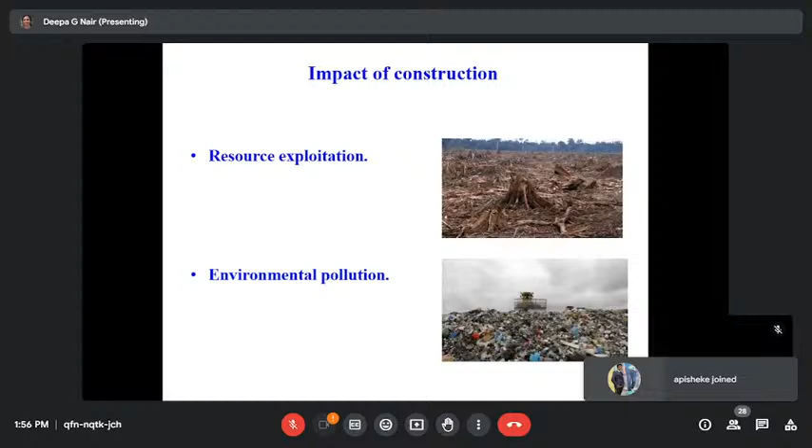Before going into those details, we can talk about the impacts we want to overcome. These are the figures: resource exploitation—40 to 50 billion metric tons of raw materials like crushed rock, sand, and gravel are extracted from quarries every year, and half of it is consumed by the construction industry.

There we need to see the importance of how far the construction industry is utilizing resources. That was a worldwide statistic. If we take the case of India, currently it is—this detail is from a 2018 reference, but we can still relate to it—0.7 million hectares of agricultural land is being used for brick kilns in India, thus destroying the suitability of topsoil for cultivation.

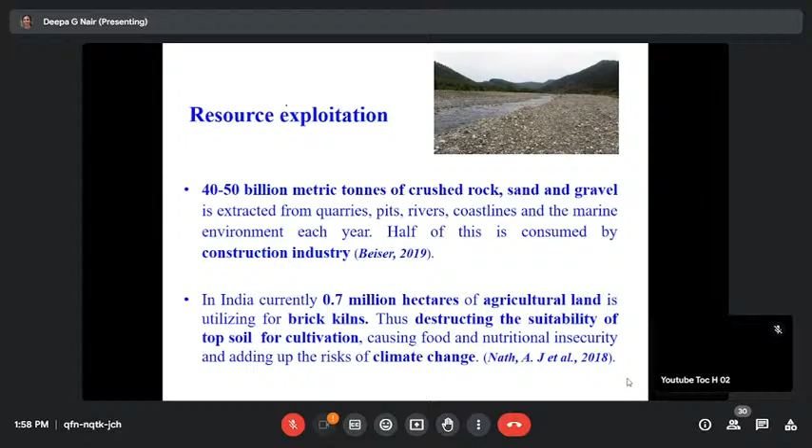Here in Kerala also we can see how far, to what extent, the land was utilized for brick kilns, how it was affecting our climate, and we were able to notice the ill effects of all those things in recent years also.

With regard to environmental pollution, embodied greenhouse gas emissions due to the construction industry are approximately 5% to 10% of the entire energy consumption in developed countries, and 10% to 30% in developing countries.

If we take the construction industry, we can see that cement is a mandatory material for construction. All activities need cement. How much quantity of energy is utilized for cement? All of us are aware about that.

1 kilogram of cement manufacture produces almost 1 kilogram of carbon dioxide. It's actually 0.9, but we can say almost the same amount of carbon dioxide. So it is contributing to environmental pollution.

And here is another figure: the building industry generates 35% of total greenhouse gas emissions and 33% of all energy consumption.

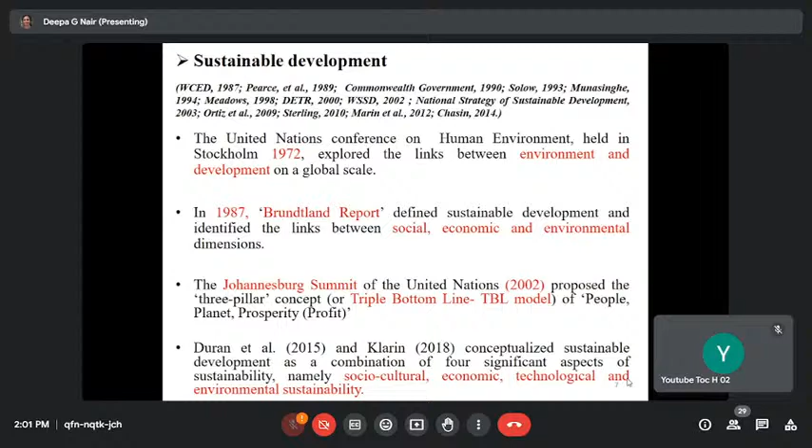Later, in the Johannesburg Summit, one more factor was added. There also they were talking about the triple bottom line concept, the 3P concept: people, planet, and prosperity. But after that, many researchers worked on this, and they introduced a fourth P related to the project, which we can call technology.

So this was the concept earlier: the 3P concept of environment, economy, and social aspects, but it has changed to the 4P concept: people, socio-cultural aspect. Whatever technology or development we are proposing, it should help the people. So we need to think about their aspirations and requirements, and accordingly propose something. Only then can it be sustainable.

And we need to think about the environment, of course. Prosperity—how far it is economical, how far it is affordable—and definitely related to the project, we need to think about the technology. So sustainable development is a 4P concept. It's actually a balance between the present needs and the future needs.

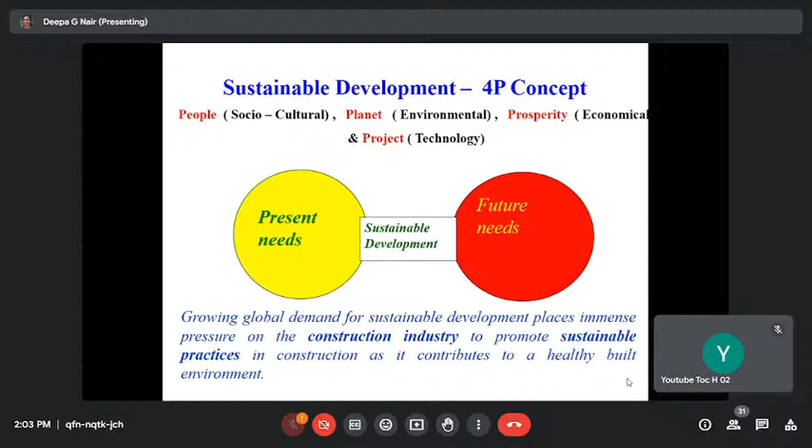Now we can see how influential the construction industry is in contributing to this objective. We need to know the importance of construction practices to make it sustainable for contributing towards this objective. Then we need to think about sustainability in construction practices, how far it is possible. We'll see that. So what is sustainable building?

If sustainable development is a balance between present needs and future needs, the same way we can connect sustainable buildings as a balance between present building needs. If you are proposing a building, it may be serving the needs of the people. So the same way, the resources we are utilizing should be there for the future generation.

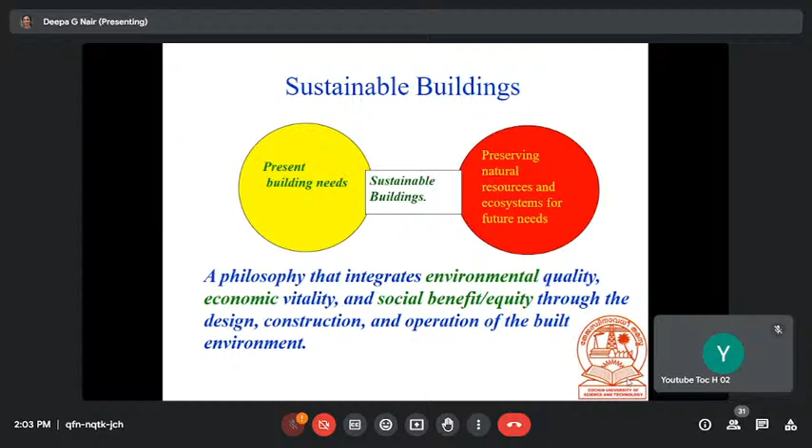So what do we need to do? Preserve the natural resources and ecosystem for future needs, without affecting the natural environment. That's the concept behind sustainable buildings.

But nowadays, all of us are talking about green buildings. Yeah, we'll come to that. So this also is a concept put forward by sustainable buildings.

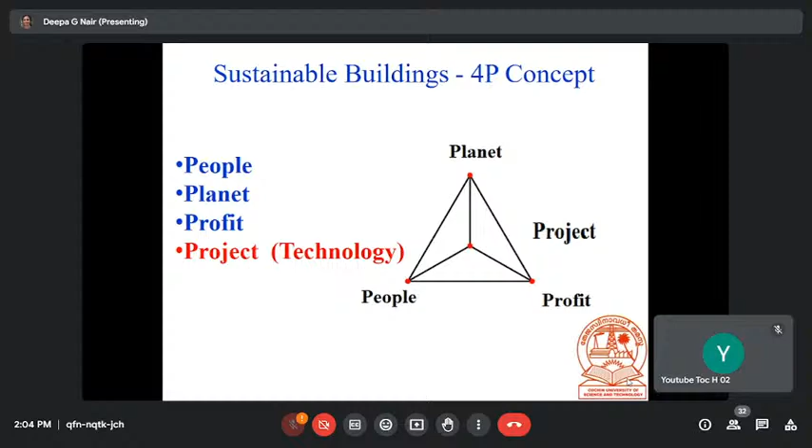But what about green buildings? Now everyone is thinking that green buildings are sustainable. Are they sustainable? In the case of green buildings, we are talking only about the environment. That's the reason it's not affordable to everyone. It's not as popular as we see with other buildings.

So, to make green buildings sustainable, we need to include the other three P's also: project/technological aspect, environmental/economic aspects, and moreover we need to consider the socio-cultural aspect, the people aspect.

Green buildings are resource-efficient construction for healthy living. This is the principle: energy efficiency, and all the resources. We have to optimize the resources. That way we'll be able to save the environment.

Energy efficiency, water efficiency, material efficiency, and along with that, environmental quality is also protected—improved air quality and less waste. All these will contribute towards healthy living.

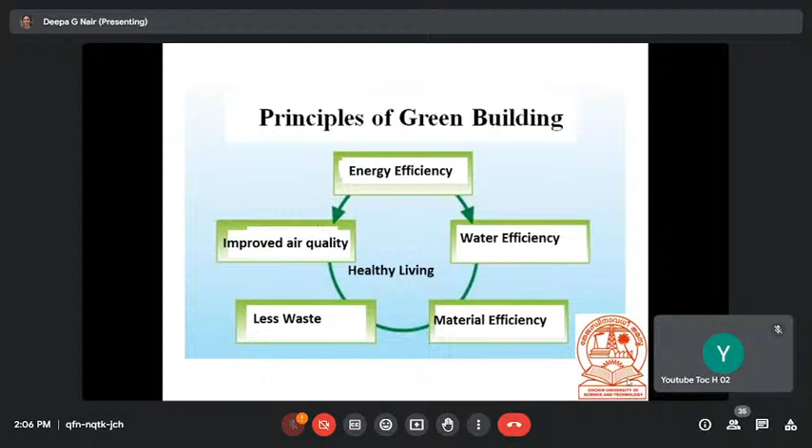But in the case of green buildings, we are talking only about the environment. We need to consider the three other P's also. How is it possible? We can do it through sustainable construction practices. So we'll discuss about that—sustainable construction.

This discussion on sustainable construction happened long back in '94. The first international conference on sustainable construction proposed the definition for sustainable construction as creating a healthy built environment using resource efficient and ecologically based principles. Here also we can see the connection with sustainable development.

In the initial stages of the discussion related to sustainable development, the focus was only on the environmental aspect. So here also the focus was initially given only on the environmental aspect. Later, like sustainable development, the three pillar concept was introduced, and now recently technological innovations are found significant. Researchers are focusing more on technological innovations to make it sustainable.

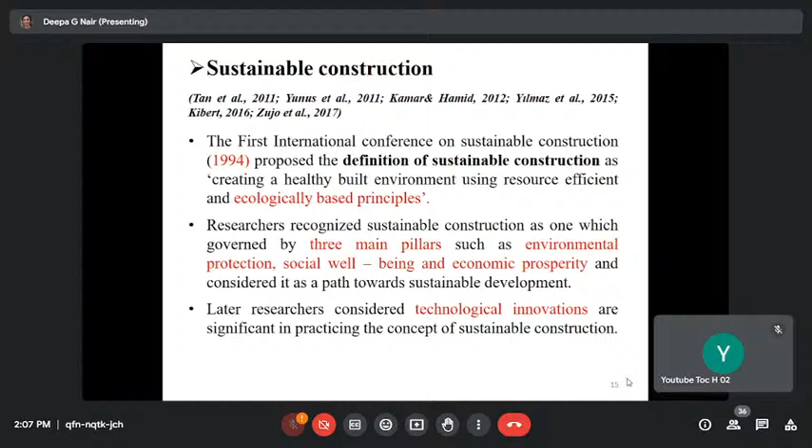We'll see that. Here we can see some tools for evaluation. Initially, I told you I'll be presenting a tool to evaluate the sustainability of construction practices. In this research, one of my research students was working on that, discussing different frameworks to evaluate the sustainability in construction practices.

It started with '94, Kibert. According to him, at that stage everyone was focusing only on the environmental aspect, so his framework was also focusing on environmental sustainability. It was found very comprehensive, but only with respect to environmental sustainability. Focus on other aspects of sustainability were found missing.

That was the issue. But later, in '94, '97, environment, economy, social, and technological sustainability were introduced in the framework by Hill et al.

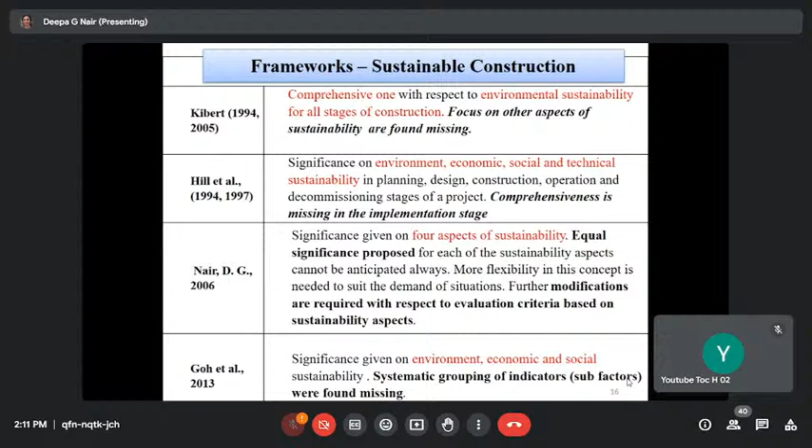Again in 2013, one more important framework was found. But there also, significance was given only to three aspects, and systematic grouping of indicators and factors were found missing. So combining all these frameworks, after completing the review and evaluation, the problems identified were like this.

Need for redefining the concept of sustainable construction. What is sustainable construction? It's not related to environment alone. How will we be able to include the other aspects of sustainability? And need for a holistic framework with respect to the objectives of sustainable construction, and need for systematic identification of indicators, criteria, and also there should not be any duplication.

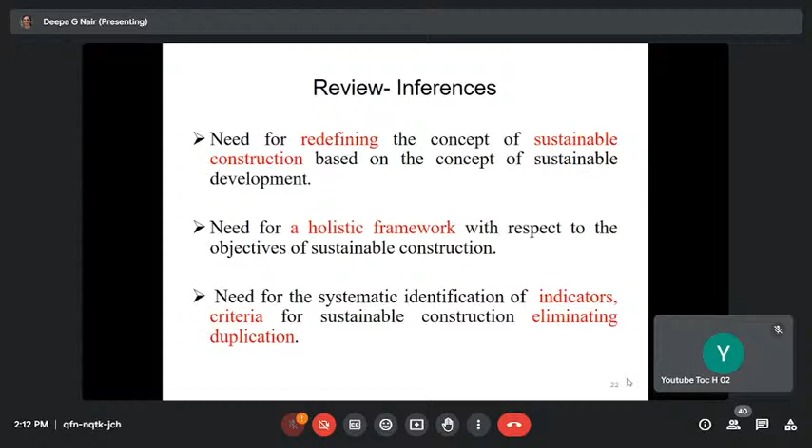If we are evaluating one criteria under a particular objective, we should not evaluate the same criteria under another objective. I'll explain it. So this is regarding the conceptual framework. A publication is also there.

So it's a 4P concept: people, planet, prosperity, and project. Project is related with the technology aspect. So the definition is like this: it is an approach or practice based on cradle to cradle concept.

Earlier we were talking about cradle to grave concept. Cradle to cradle concept is we are utilizing the material again and again. We are not going to dispose it off. If you are disposing it in the environment, it will again contribute to pollution. But if you are able to reuse it, it will add to resource efficiency. So this is one important point, cradle to cradle concept, which is socially acceptable.

That is the people aspect. Economically affordable, that's the prosperity aspect, profit economy aspect. Technologically reliable, project aspect. And environment friendly, contributing towards sustainable development. So as you see in this figure, the objective is sustainable construction and sub-objectives are socio-cultural sustainability, economic sustainability, technological sustainability, and environmental sustainability.

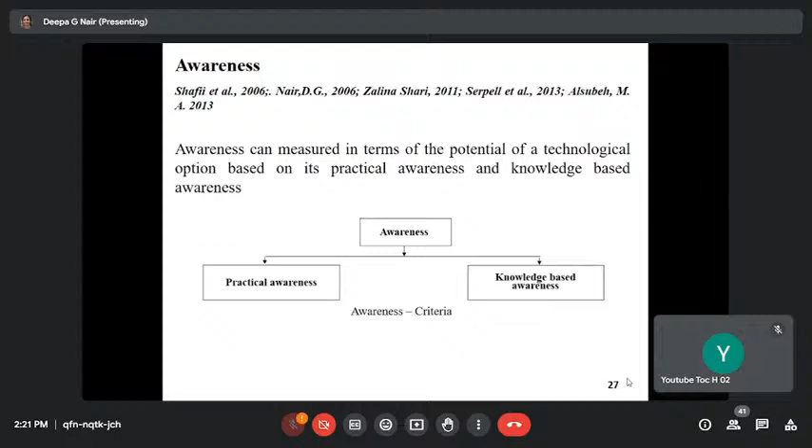And also adaptability, flexibility, and feasibility according to the changing needs of the users with respect to site conditions, style, and harmony with culture.

If you are proposing a particular technology and saying that this is innovative, you can adopt it, consider it a sustainable technology, but that particular technology may not be adaptable to the site conditions. Maybe I can give you the example of prefabricated construction. We need heavy machineries. So what will be the case if you are going to adopt prefabricated construction in hilly areas? There it will be difficult.

According to the site conditions, for prefabricated construction, the plan may be given, and according to the plan different wall panels and roof panels are made. Then it will be difficult to change the style, so there will be a problem. So adaptability is limited.

And we also need to think about harmony with culture and tradition, whether this particular technology being proposed is in line with the harmony and culture of the people, of the stakeholders. So there are different criteria to evaluate this.

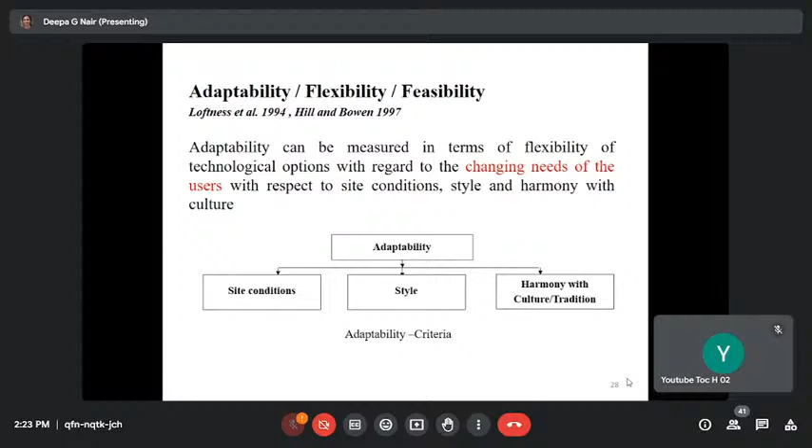And the next thing is satisfaction. What we usually call satisfaction can be evaluated by the satisfaction of all stakeholders with regard to trustworthiness, attitude, comfort, and security based on their personal preferences.

So here also we can do the evaluation based on the personal preferences of the stakeholders. All the indicators coming under socio-cultural sustainability, since it is related with people, will be varying. Only qualitative evaluation is possible.

If I am saying that this is suitable to my comfort, I may be satisfied with this particular technology, but some other person may have a different comfort. He may say that it's not good for them. Accordingly, it will vary.

Trustworthiness is also important, reliability. Otherwise, if we are proposing a technology saying it is cost effective, that you can reduce the cost, like the case of filler slab and cost effective environment construction techniques where 30% of the cost can be reduced, people lose reliability in the technology due to failure of the construction.

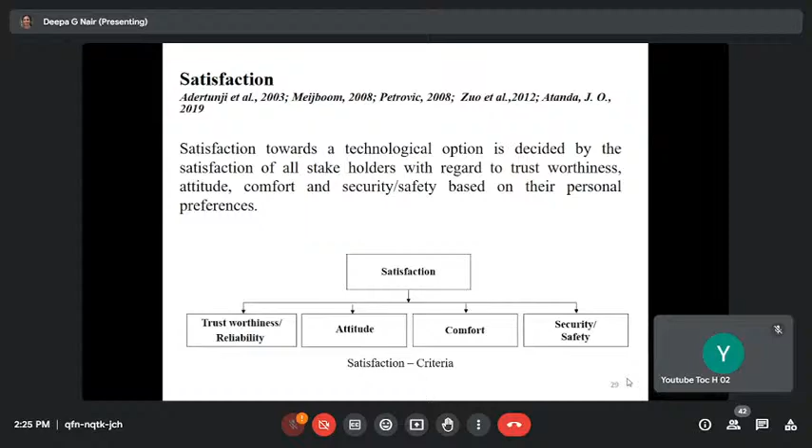So all these aspects, all these criteria, all these indicators are related to the people aspect. Security and safety are also very important. And comfort, there are many criteria for comfort, like age group comfort, thermal comfort, visual comfort, acoustic comfort, and privacy, all those things.

For different age group people, a certain type of flooring may be aesthetically very good, so visual comfort is there, and cost is also less, but it is too slippery. Whether we'll be able to adopt it, we have to consider many factors.

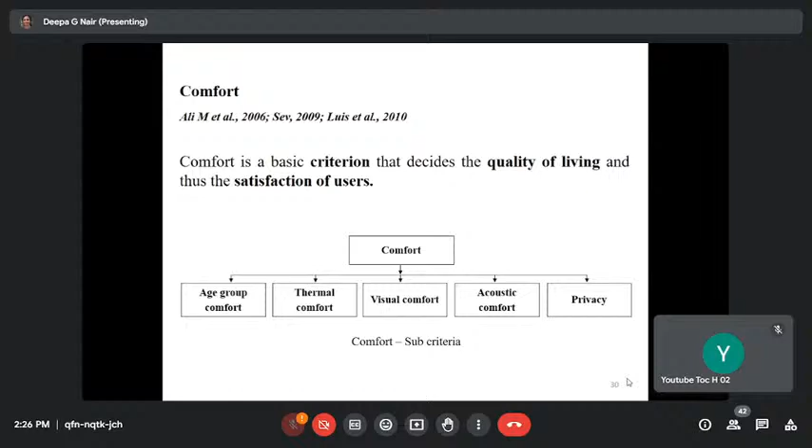So for socio-cultural sustainability, if we group all those things we have discussed so far, we can see that socio-cultural sustainability is a sub-objective of sustainable construction. As we see here, sustainable construction is the objective, and it is a cradle-to-cradle concept. To achieve sustainability in construction, we have to fulfill the objectives under all these four aspects.

So for measuring socio-cultural sustainability, the indicators identified are community participation, awareness, adaptability, and satisfaction, and each of these can be measured with respect to the criteria and sub-criteria as shown in the figure.

Now we'll discuss the second aspect, economic sustainability or affordability. Usually the synonym is affordability. Whatever we are proposing, it should be affordable to the people, affordable to the stakeholders.

Otherwise, like the example of solar panels, we can say that it is environmentally energy efficient, environmental sustainability is there, we can reduce the cost, we can reduce the usage of energy from conventional sources if utilizing solar panels. But how far will we be able to, how many people can implement this technology in their houses? How long do we need to wait to get back the money?

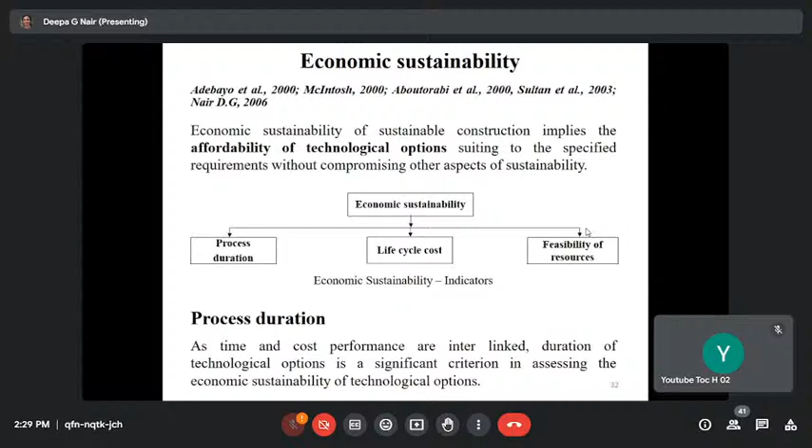And life cycle cost, feasibility of resources - life cycle cost, there also many criteria are there, like initial cost, cost in use, environmental cost, residual value. All these will contribute towards the economic sustainability.

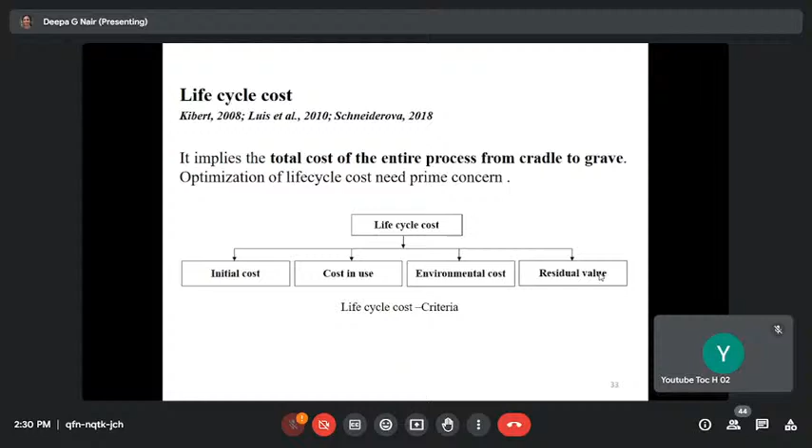If you are proposing a technology and saying that the initial cost is less, we have to think about the cost in use, whether the total cost of this particular technology will be affecting the sustainability aspect, whether there is any hidden environmental cost, and what will be the residual value. All those things will contribute to economic sustainability.

And feasibility of resources is also very important. We may be having many innovative options around us in construction, but if we check the feasibility of resources, material availability - usually we see that these materials can be utilized as cement replacement, but are they available locally? Is the technology available? Technology may be available, but infrastructure feasibility is not there.

So that is also another important factor to popularize the technology. Actually, all these things are related with the economical aspect. Popularizing the technology is related with the socio-cultural aspect, but economy aspect includes the infrastructural feasibility and labor accessibility. This was also an important aspect related with the rat-trap bond construction.

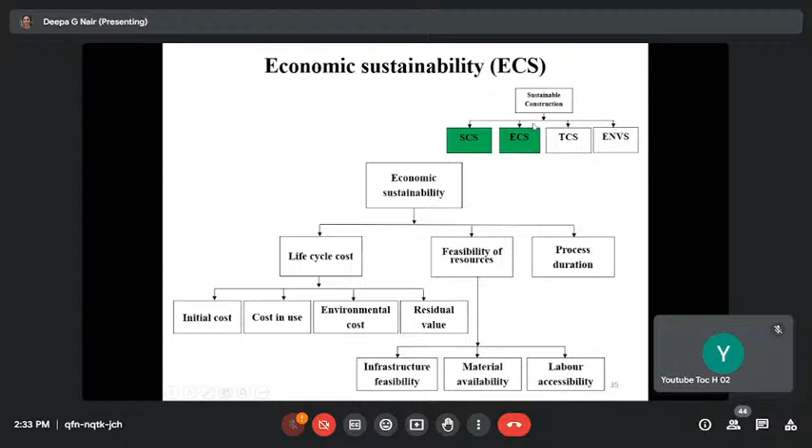Now, we'll come to this technological aspect. All of us are very much aware about the technological aspect. Basic aspects are strength and durability. Depending upon the options, the criteria will vary. If it is a building block, what are the requirements of strength and what are the requirements of durability, weathering resistance - we have to measure accordingly.

So according to the technological option, quantitative evaluation can be done on technological sustainability. That's what presently we are doing. If you are proposing a technology, basically in the lab, we will do the technological evaluation only. We won't consider, we may be considering the initial cost based on a small scale experiment, we may be comparing it, but mainly as technologists, we will be evaluating this part.

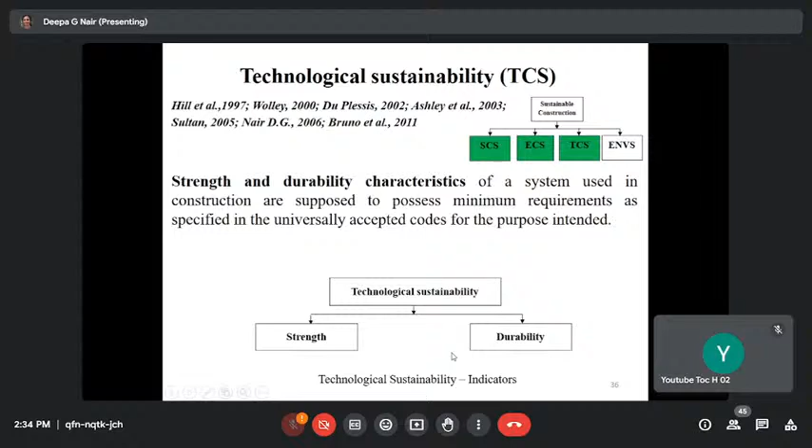Now, what about this environmental sustainability? This is the major aspect. As we discussed in the beginning, impacts of construction are basically on environmental quality and resource depletion. So the objectives need to address these two aspects - how the environmental quality can be maintained, how the resources can be protected.

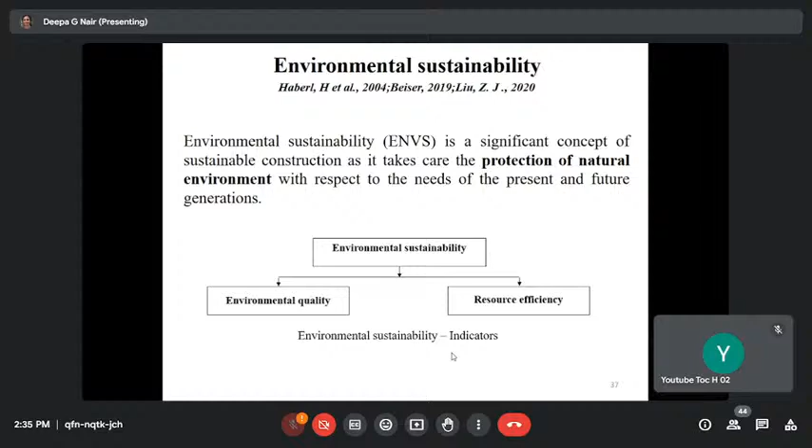So environmental sustainability in construction takes care of the protection of natural environment with respect to the needs of the present and future generations. So how can we measure these indicators? Environmental quality - disturbances in ecobalance, land degradation, air pollution, and energy consumption are the main concerns due to construction and related activities.

We need to maintain a healthy living environment. So what are the criteria? We need air quality, we need water quality, we need noise quality, we need quality waste. So, if you are proposing a technology, you need to take care of all these aspects.

What about the air quality? You just think about the construction site, how much dust is available. Water quality, how far it is affected - during the construction, before the construction, collection of raw materials. And with respect to noise quality, how far it is disturbing the local environment based on noises. Quarry sites you can think about.

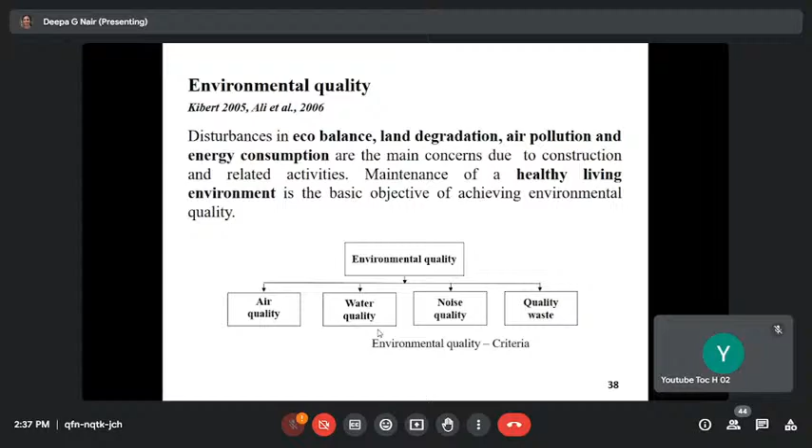Quality waste is another important aspect. During construction and before raw material collection and processing, we get waste materials every time. But are we able to utilize this waste? That way we can also compare the technology. For a particular technology, if this much waste is produced and 90% of it can be utilized, that means only 10% is disposed to the environment, so environmental quality is not that affected.

Resource efficiency includes material efficiency, water efficiency, energy efficiency, and land adequacy, which is also a resource. It implies the efficient use of resources in sustainable construction with minimal environmental impact.

For material efficiency, take the example of cement, a highly resource intensive material. Highly resource intensive means high amounts of energy are required, raw materials are required in large quantity, and it disturbs the natural environment. So cement manufacture is highly affecting the quality of the environment and disturbing the natural ecosystem.

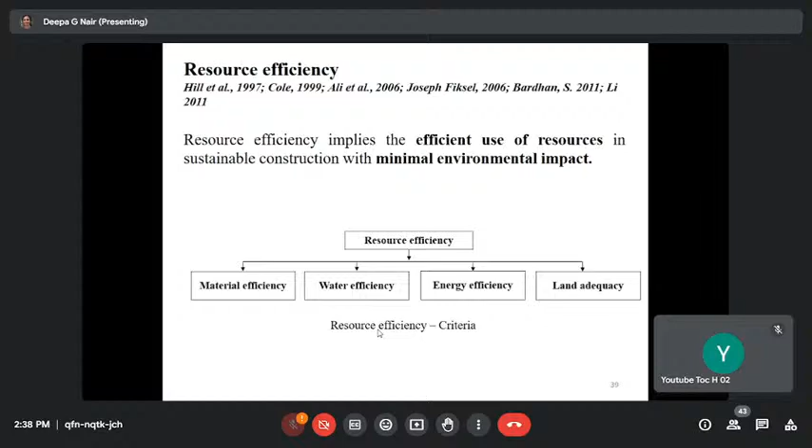Material efficiency can be measured in terms of material adequacy and quantity of utilization of local materials. If you think about a particular construction activity, for example constructing a wall for a residential building, we can think about the utilization of local materials—either mud construction or any other locally available material. If you think about concrete blocks, if they are locally made, that also contributes to material efficiency.

Then what about material adequacy? Usually for each construction aspect like wall, roof, plastering, flooring, we know the specific standards. For load bearing masonry, what is the minimum standard required for load bearing building blocks? For concrete blocks, usually it is 4.5 Newton per millimeter square. For non-load bearing blocks, like what we see in frame construction, the requirement is 2.5 Newton per millimeter square. We need to focus on the strength of these blocks.

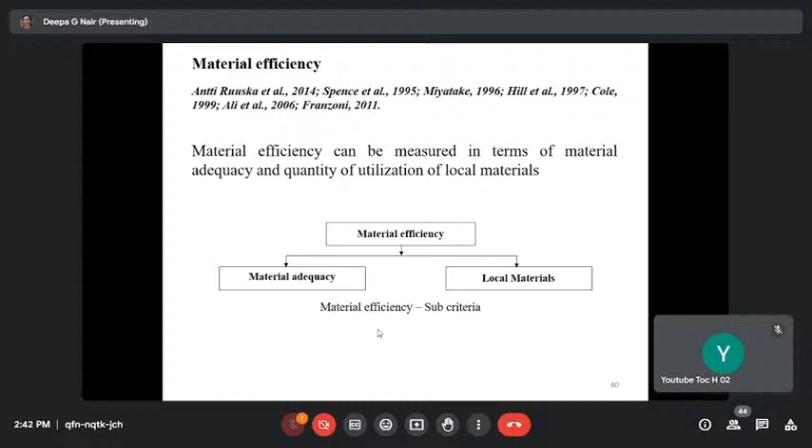We can reduce the quantity of materials either by using cement replacement materials. So this is only an example. Whatever technology we adopt, we need to focus on material efficiency and use of local materials. Local materials can be renewable materials, reusable materials, recyclable materials, and waste materials. These are the sub-criteria, and accordingly we can measure the material efficiency.

Energy efficiency is very important with respect to embodied energy and operational energy. Embodied energy is an important term—energy embedded in a material. It's the sum of the energy required for acquiring raw materials, transporting them to the site, and manufacturing the material. Think about blocks or bricks: first we need raw material, we transport it to the factory, then we manufacture the bricks—there we need energy. Then transporting to the construction site also requires energy.

So embodied energy is the sum of all these energy components, and it will be different in different places. How can we reduce this embodied energy? If you are using locally available, naturally available materials, especially waste materials, no energy component is there—embodied energy will be zero in that case. Once construction is done, if we need any energy for operating it, that also contributes to the total energy. So both embodied energy and operational energy are very important.

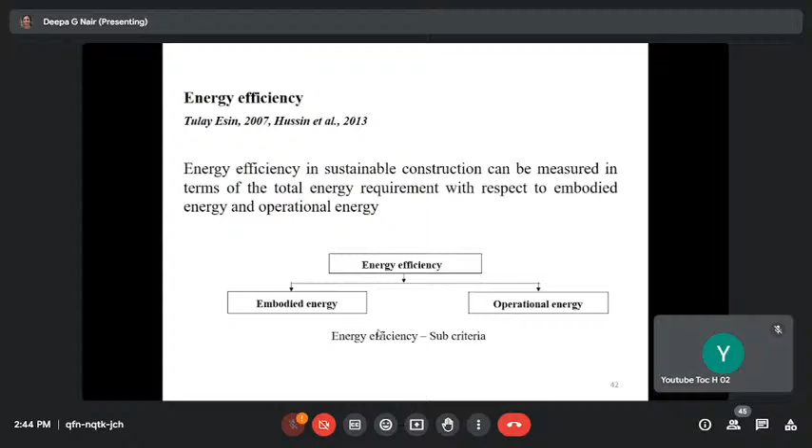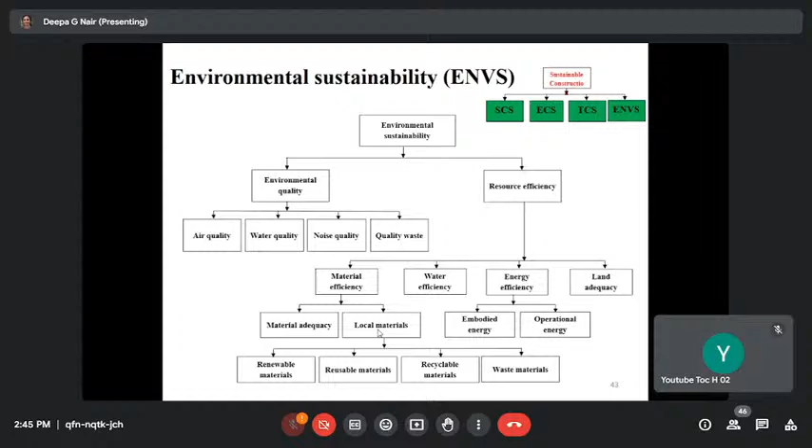Energy can always be minimized by the utilization of local materials with zero embodied energy. This is the tree for environmental sustainability, with only two indicators: environmental quality and resource efficiency. Under these indicators, we have many criteria and sub-criteria. This way, we'll be able to evaluate the environmental sustainability of technological options.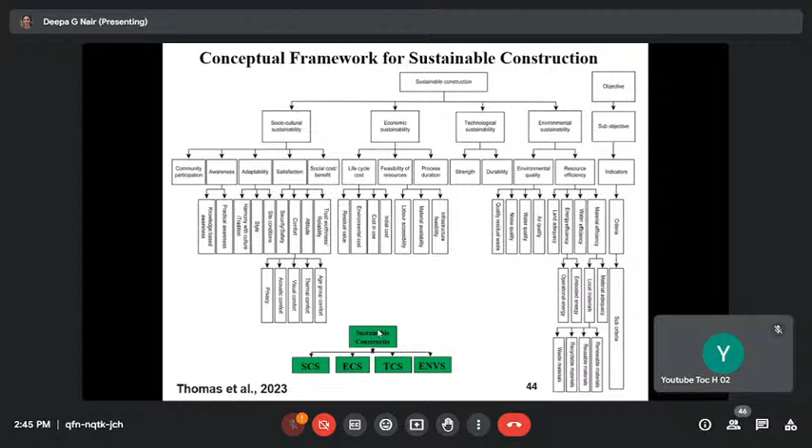So these are the implementation guidelines. As we said, socio-cultural sustainability is highly dependent on variations in the preferences of individuals and changing requirements of circumstances. Hence, qualitative evaluation after implementation of the technology can be recommended. How can we do the qualitative evaluation? We need to do questionnaire surveys. If you want to compare alternative technological options to check sustainability based on socio-cultural aspects, we need to go for questionnaire surveys.

Technological sustainability involves quantitative evaluation. We get the results from experiments. What about the strength? What are the standard specifications for durability? Are these options meeting those requirements? In that case, quantitative evaluation is possible.

In economic and environmental sustainability, it needs a mixed approach, partially qualitative and partially quantitative. So there also, if you want to use this conceptual framework, it is a little bit lengthy process. We have to do questionnaire surveys and also quantitative evaluation, giving different points. It is an additive weighting technique. Simple additive weighting technique can be recommended for evaluating the sustainability index.

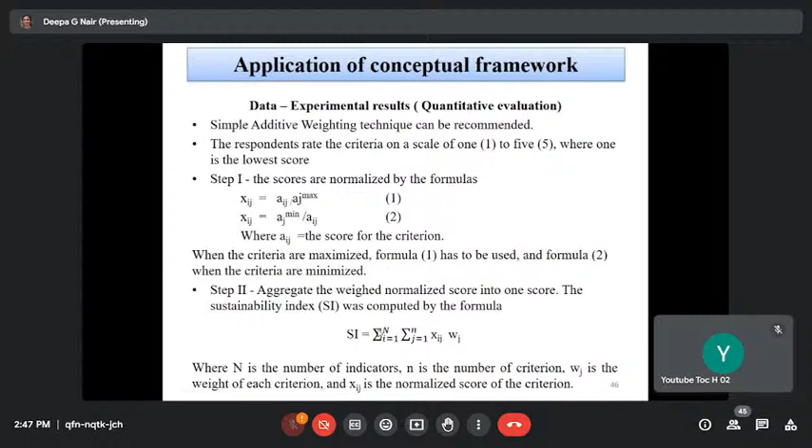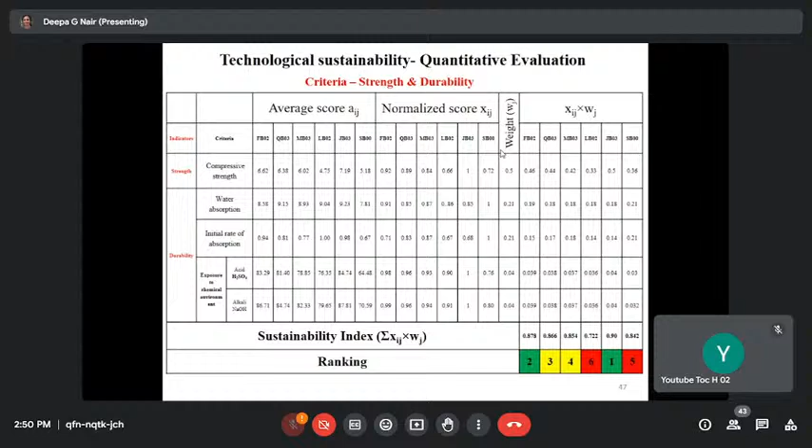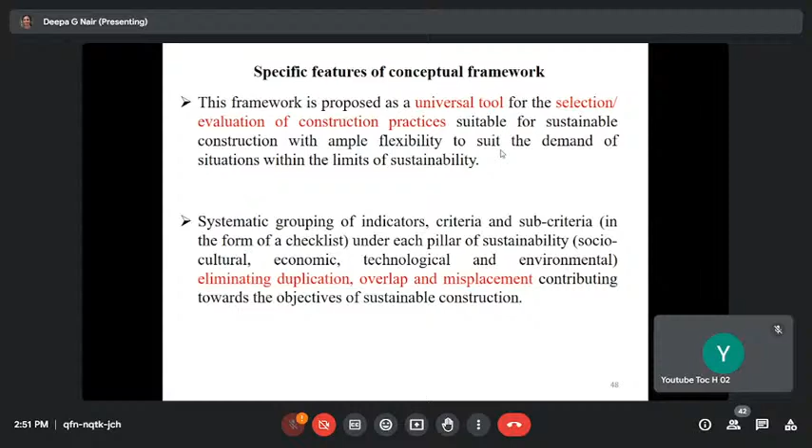So these are the specific features of this framework. This framework can be proposed as a universal tool for the selection and evaluation of construction practices. If you want to select a particular technology, you can compare it. If you want to evaluate a technological option that is already implemented, this framework can be adopted. It also provides systematic grouping of indicators, eliminating duplication, overlap, and misplacement. This is an advantage of this framework - we can consider it as a holistic framework.

Now we'll see a qualitative evaluation, not that comprehensive, of the construction practices in Kerala based on sustainability, without doing any questionnaire survey. We'll see the evaluation of sustainability practices in Kerala.

This is our traditional construction. This was our traditional building. Stonework was restricted to the plinth, and laterite was used for the walls, or sometimes wooden walls were used. Roof structure in timber frame was covered with palm or coconut leaf, thatching or tiles.

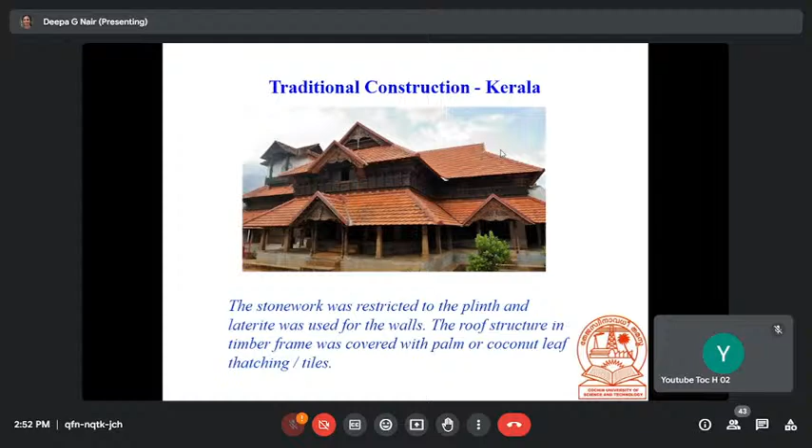And you know what is our conventional construction, present construction. I don't have the picture because every day we are seeing such construction. But this cost effective and environment friendly technology was implemented during the early years of 1980s to solve the housing problem in Kerala. CEEF technology was introduced by Laurie Baker. Now we have many organizations like COSTFORD, Habitat, Nirmiti Kendra, all of them actively working on this. But now this type of construction is very less.

Thought of just evaluating it, what can be the problem, why this technology, having many advantages, is facing reasons for failure, why people are reluctant to take this technology. In that background, an evaluation was done.

So I'll just give you an idea what CEEF technology is, for those students who are not aware. CEEF technology buildings are characterized by brick masonry walls without plastering, exposed brickwork, with rat trap bond or Flemish bond, filler slab roofing, precast lintels, brick arches, corbelling. These are the common features. Natural ventilation in rooms is facilitated through artistically designed honeycomb brickwork. These are the characteristics of CEEF technology buildings.

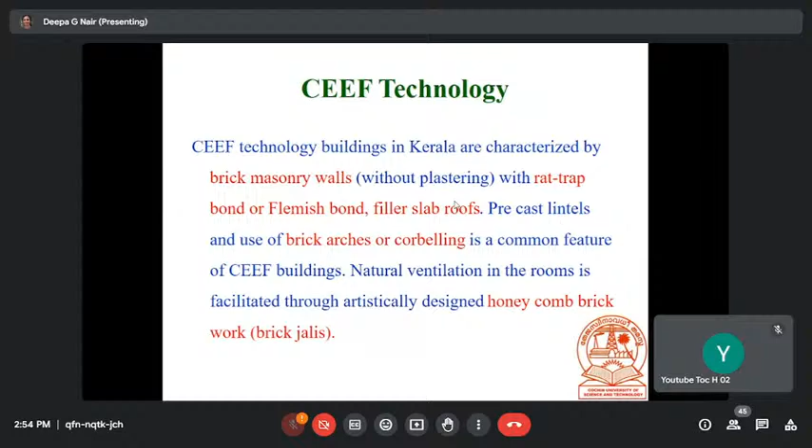So these are the advantages. Now we can do a comparison. Economy and environment are the advantages of CEEF technology option. We'll consider that technologically both are the same, comparable. So we'll just compare this with respect to economy, environment, and also social aspects.

So conventionally, if you're going for foundation, we won't be able to suggest a particular foundation because that depends upon the type of soil. Usually conventionally we go for random rubble masonry in cement mortar, or we can also go for laterite or brick masonry in cement mortar. Sometimes RCC work, piling, deep foundation is required, in that case we need to go for that.

But in CEEF technology, random rubble masonry in cement mortar can sometimes be replaced by mud mortar or dry packing, depending upon the type of soil. Combination mortar can also be used. In the case of deep foundation, we can go for ground improvement techniques: sand piling, bamboo piling, brick arch foundation, stub foundation.

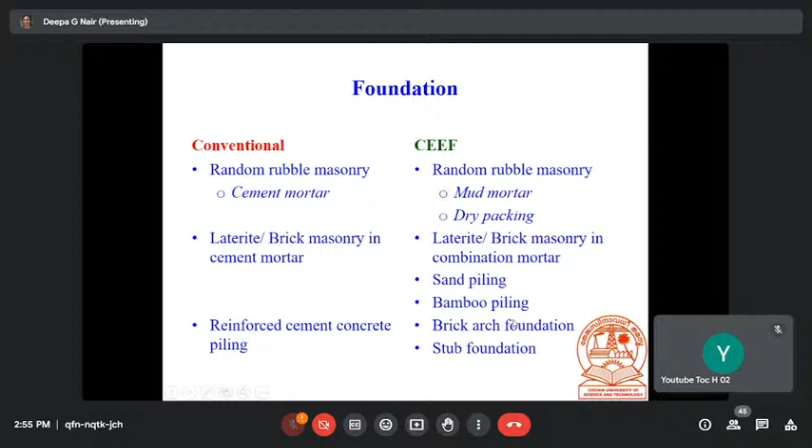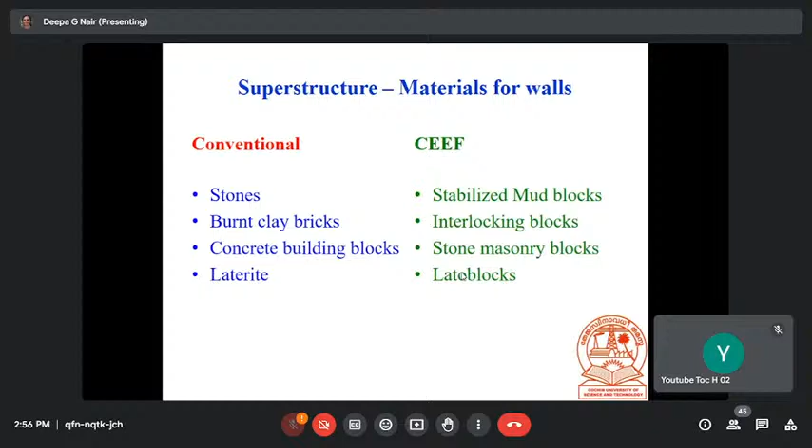In the case of walls, conventionally we go for stones, burnt clay bricks, concrete building blocks, laterite. CEEF technology has many options, but how far are we using this? How far is it popular? Stabilized mud blocks, interlocking blocks, stone masonry blocks, Latoblocks.

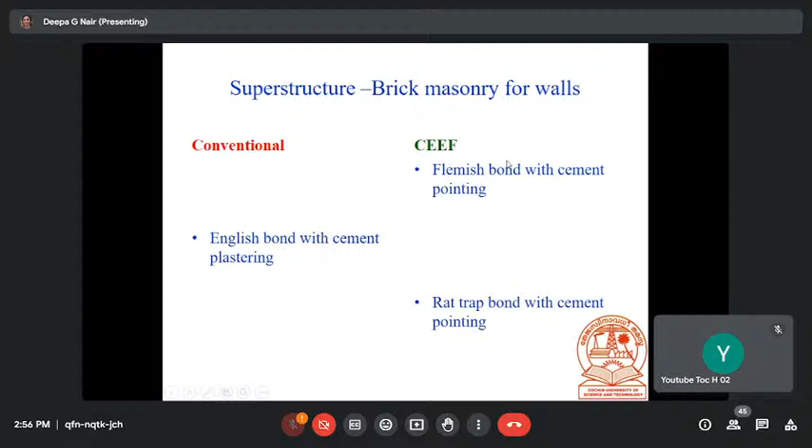And now we take the masonry. As I told earlier, English bond with cement plastering is the conventional method. CEEF technology uses Flemish bond with cement pointing, or rat trap bond with cement pointing. This is the case of rat trap bond.

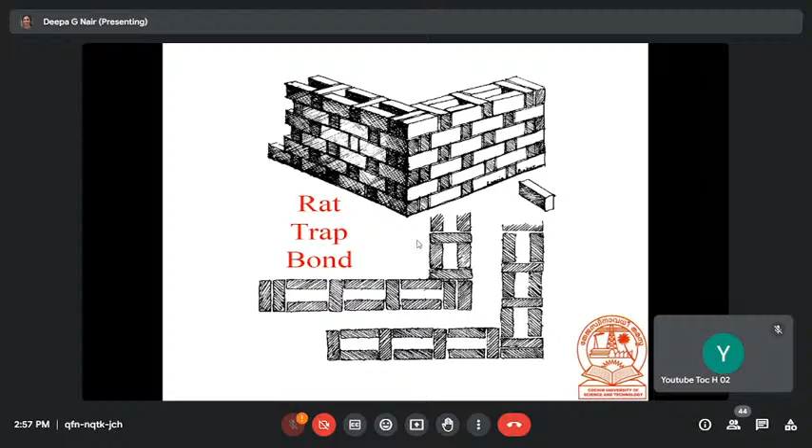Cavity wall construction: bricks are placed on edges. Usually we'll keep the brick flat, but here the bricks are kept on edges, so we'll have a cavity in between. What is the advantage? It will increase the thermal comfort inside the building, and also fewer brick bats are used, so quantity of waste brick can be reduced. This is the construction of rat trap bond masonry.

And if you see the case of lintel or beam over the opening, conventionally we go for RCC lintels. Traditional buildings show natural lintels, stone or wooden lintels. In CEEF technology, mainly arches are used. The aesthetic appearance of the brick building is good. Precast lintels can also be proposed.

Sometimes brick wooden lintels. Here are some pictures of arches, different types of arches. Bricks are kept on edge for maximum opening up to 1 meter.

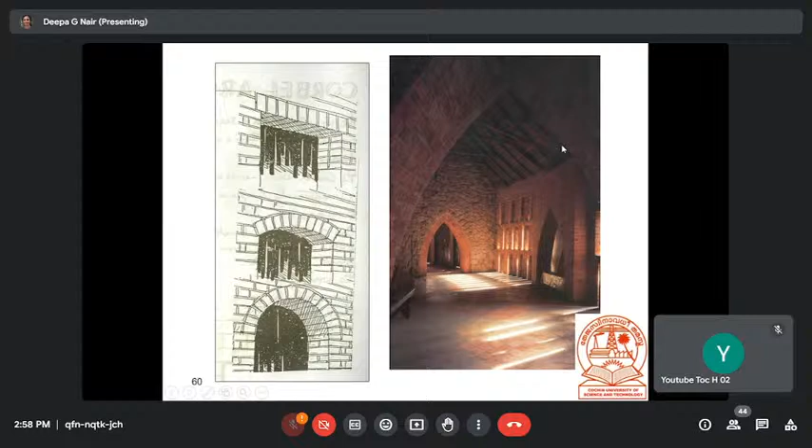Segmental arch, pointed arch, semicircular arch, different types of arches. It will improve the aesthetic appearance.

This is a corbelled arch, keeping the brick one above the other with a maximum projection of 1/4 of the length of the brick. This way, if you are extending, spanning over the opening, it will be like this. So this is a corbelled arch.

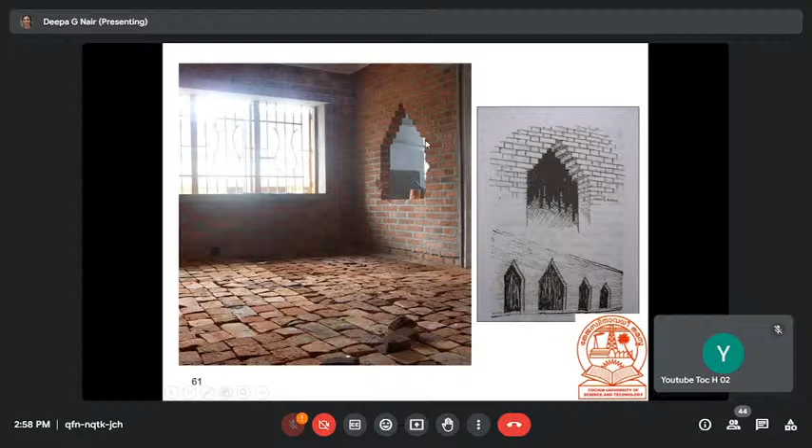Openings, natural ventilation. Traditionally, conventionally, we go for windows. But what about CEEF technology options?

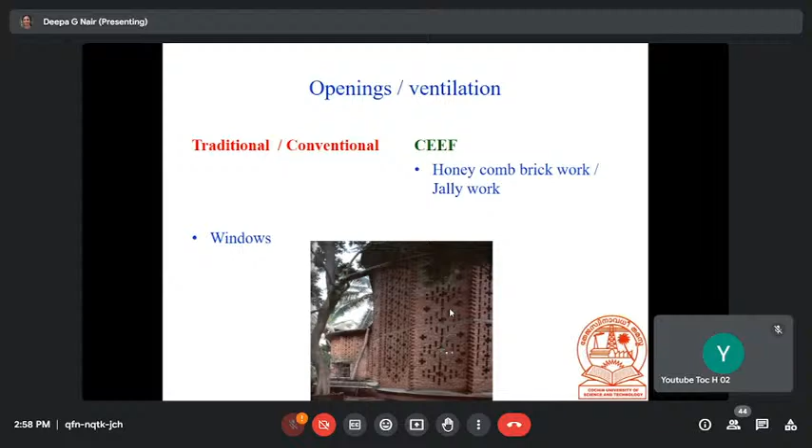Honeycomb brickwork, jally work, sometimes pivoted windows are also there. I'm not sure about this picture. Yeah, pivoted windows can also be provided.

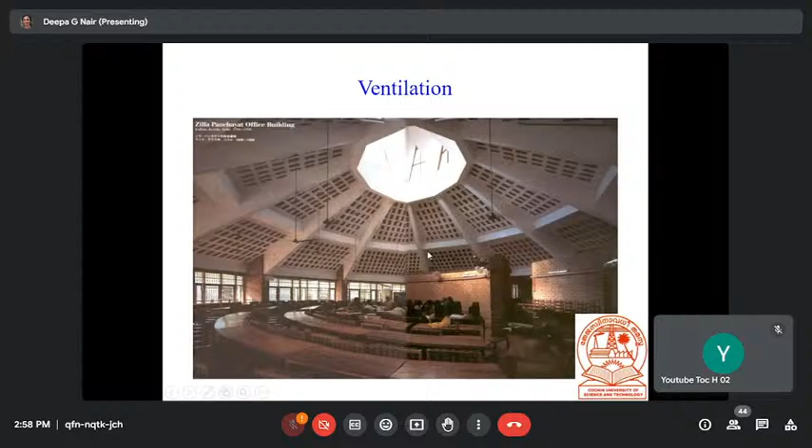Natural ventilation through these openings. We can see this in a bigger auditorium also. And this is the picture of laterite filler slabs.

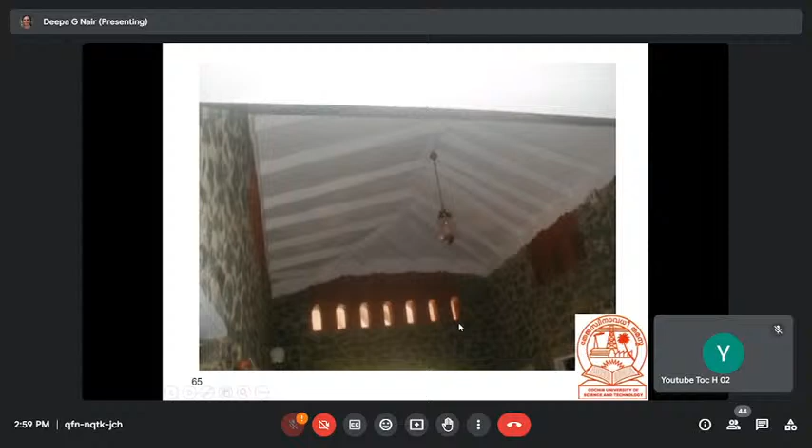Natural ventilation through honeycomb brickwork, jally work. Again, this is a picture of a residential building. Natural ventilation is facilitated, we can see that.

We go for roofing. Traditionally, conventionally, thatch roofing over wooden trusses, clay tiles over wooden trusses, RCC roofing. But in CEEF technology, filler slab roofing, shell roofing, precast brick paneling, LPAN roofing - different options are there.

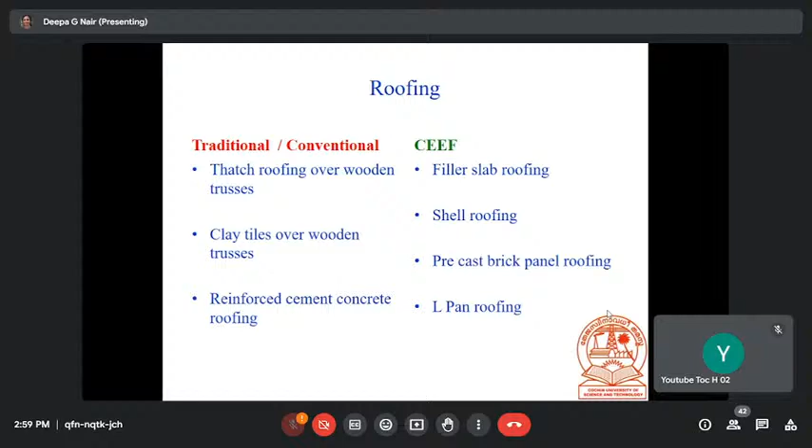But how many of us are aware about all these things? Even being civil engineers, we are not able to utilize it in our own construction. What can be the reason?

This is filler slab construction. What is the principle of filler slab? Below the neutral axis, actually concrete is not required. Steel will take the tensile stresses. So that place can be replaced with any filler material.

The filler material commonly used is Mangalore pattern roofing tiles. It is kept in such a way that the upper one will be placed in the normal way, the bottom one will be placed in the reverse direction, so that there will be an opening, a cavity in between. That also will help in improving the thermal comfort inside the building. So you can see this section.

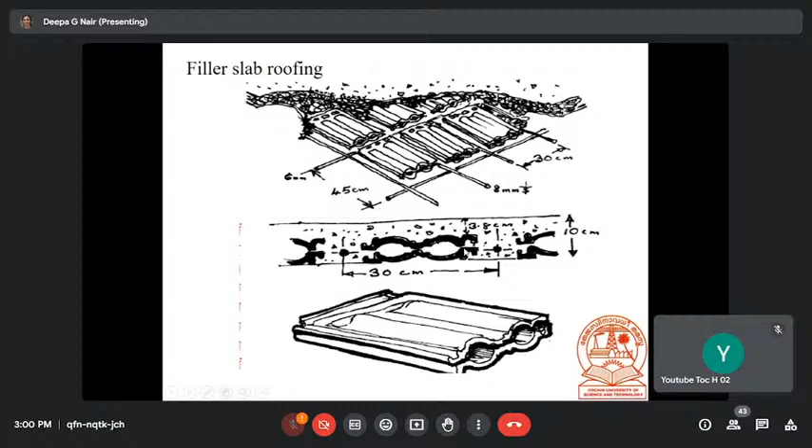CEEF technology was used earlier in public buildings. Here in Cochin University also we had two buildings using it, as Aditi Bhavan buildings earlier. Later, one of the buildings was converted into an engineering office building, so they plastered it. That also is an issue.

People - this type of construction is not that acceptable to them. What is the reason? The other building is there in the campus, but no proper maintenance is done. Without proper maintenance, it will affect the structure. So such issues can be seen.

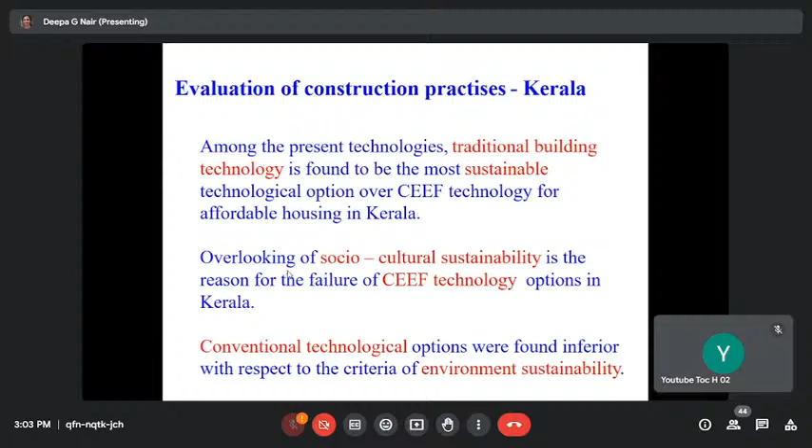All these aspects - community participation, awareness - were not there, along with adaptability and satisfaction. Government was giving some benefits to those people implementing this type, but it was not enough with respect to all these aspects.

People were not aware about the technology. Without having proper knowledge-based awareness, this technology was implemented and the technology failure happened.

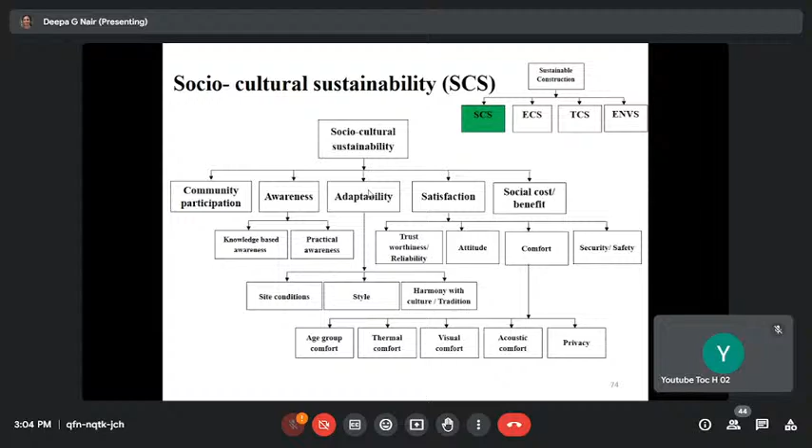This is an option - an alternative technological option for sustainable housing. Actually, I should not say sustainable housing, maybe a green building or something like that, because other aspects we need to check. So, utilization of waste material for prefabricated construction - you may be aware about FRBL panels or GFRG wall panels, glass fiber reinforced gypsum wall panels.

It was utilizing the waste material from our FACT. So this is the first building, from 2008, made of FRBL wall panels. They called it a rapid house because it required only 21 days for the completion of nearly 2000 square feet building. Walls, roofing, everything was made of these FRBL panels.

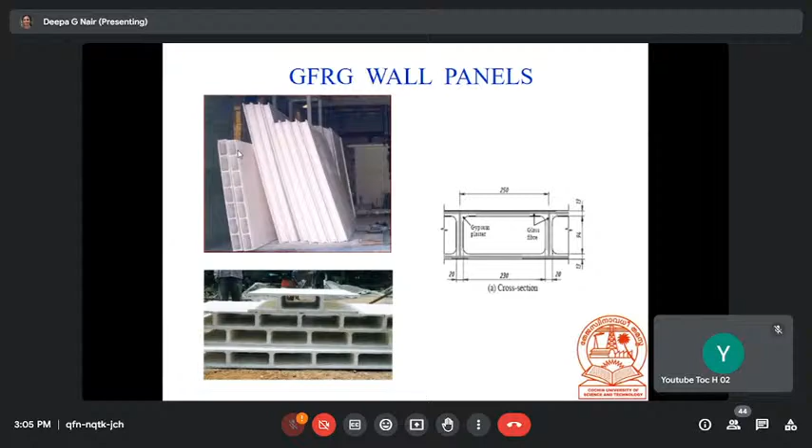So this is the process: phosphogypsum after calcination, rapid wall production, glass fiber and water additives were added, then drying it up and cutting the panels and dispatching it. This is the manufacturing process.

If you are able to give the plan of your building, they will be able to make different wall panels. Even the same panel can be used as the roofing.

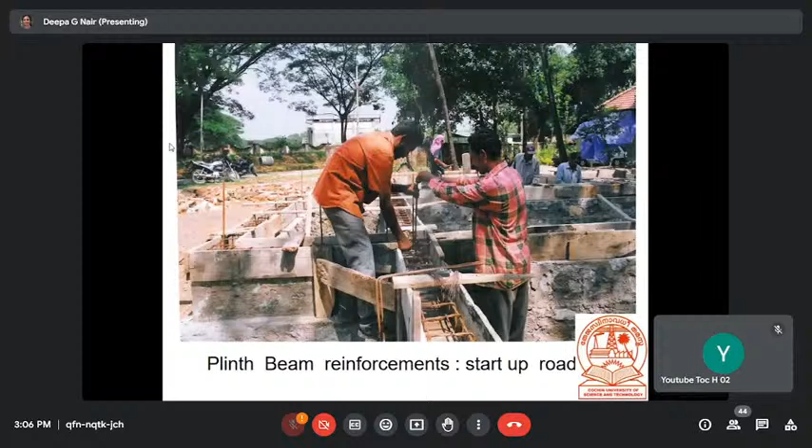So these are different stages of the construction. Plinth foundation can be laid in the normal way as we do for other buildings. After checking the bearing capacity of the soil, we can decide the foundation. Then plinth beam reinforcements and startup rods are driven.

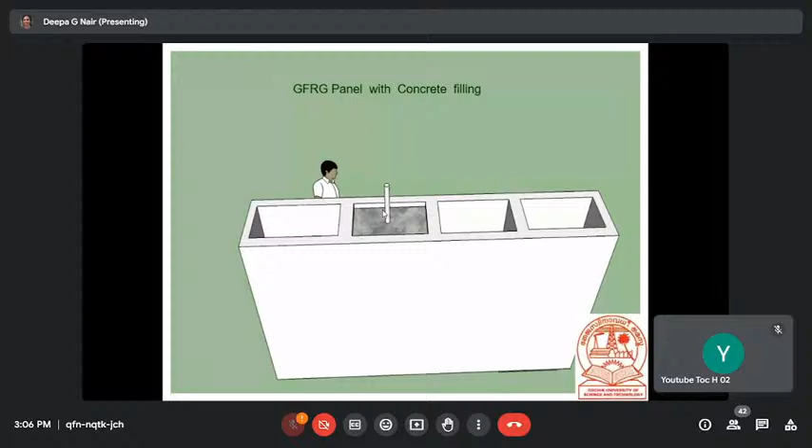And positioning the walls on the foundation, and then in between some columns - for any joints to connect the other wall, we can fill up this cavity because already the reinforcement is there near the joints. The reinforcements will act as a column with lean concrete, fixing the ground floor panels.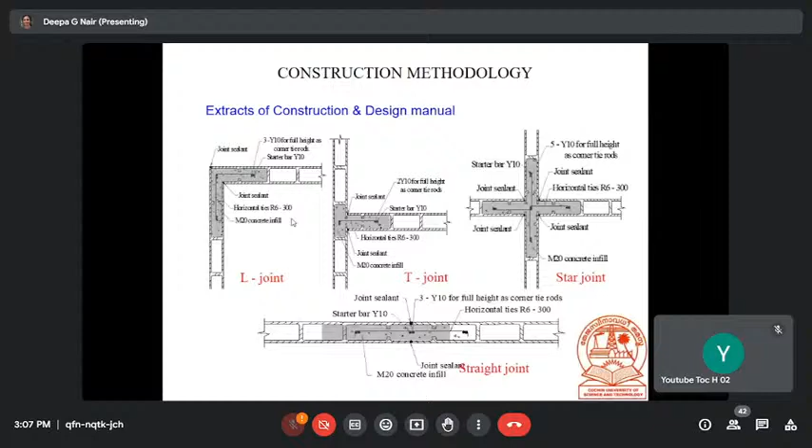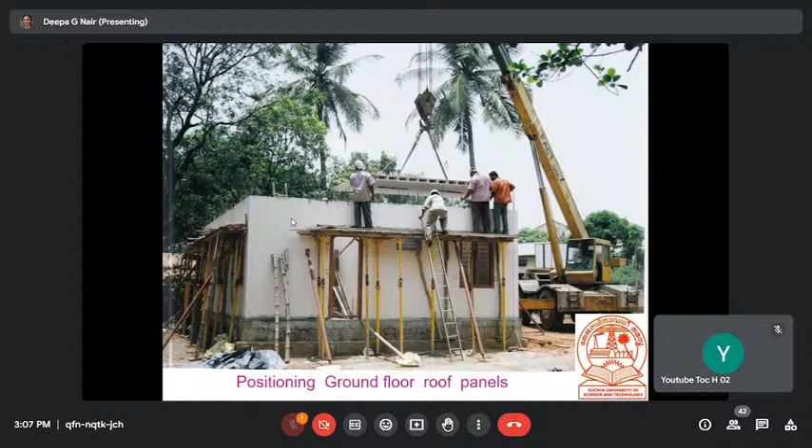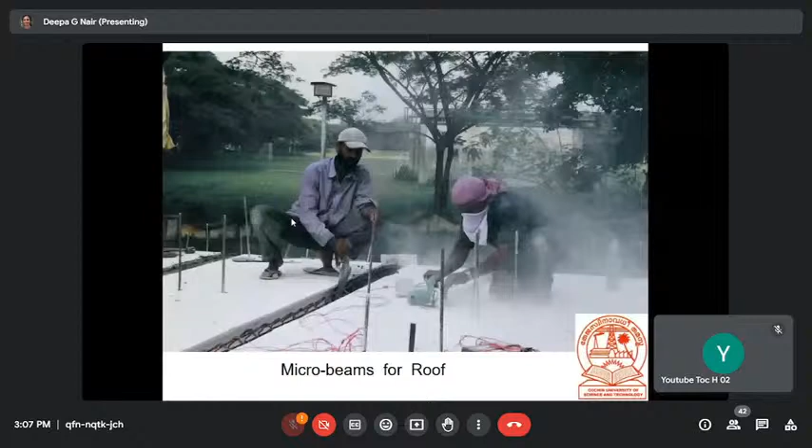Door fixing, positioning of the ground floor roof panels. Then after placing these roof panels, if you want to connect two panels, the cavity was broken and then micro beams were laid for the roof like this. This way we can connect two roof panels, with different sections for construction methodology, a typical roof floor slab pattern.

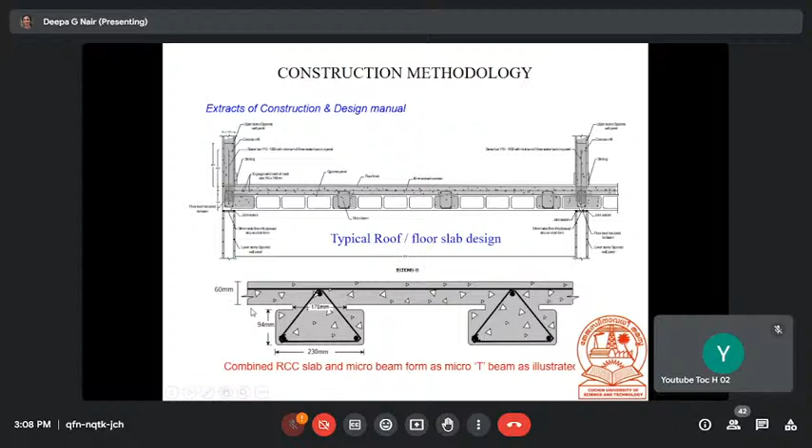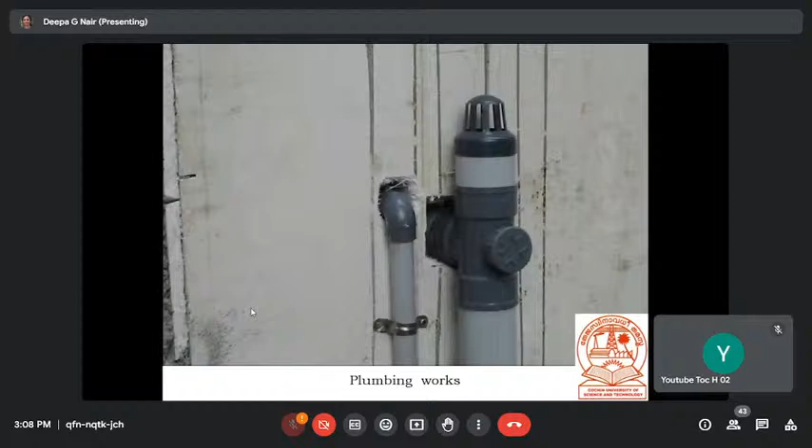And over this, again, a 60 millimeter, 6 centimeter concreting was done - concreting for the first floor. And then positioning of the first floor wall panels. Plumbing was also done, and painting. In 23 days, not 21 days - it's 23 days.

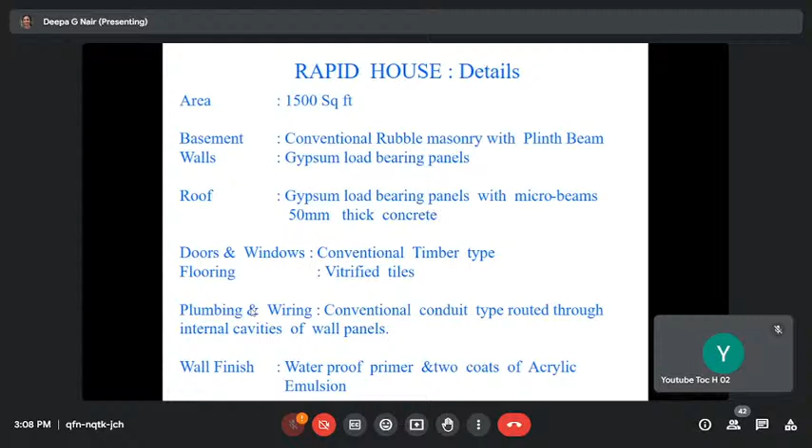1,500 square feet. Basement: conventional rubble masonry with plinth beam, foundation and basement. Walls: gypsum load bearing panels, roof also the same. Doors and windows: conventional timber type. Flooring with vitrified tiles, plumbing, wiring, wall finishing. Advantages were speedy construction, reduction in cost, minimum use of cement, steel, sand, earthquake resistance, eco-friendliness, and better insulation.

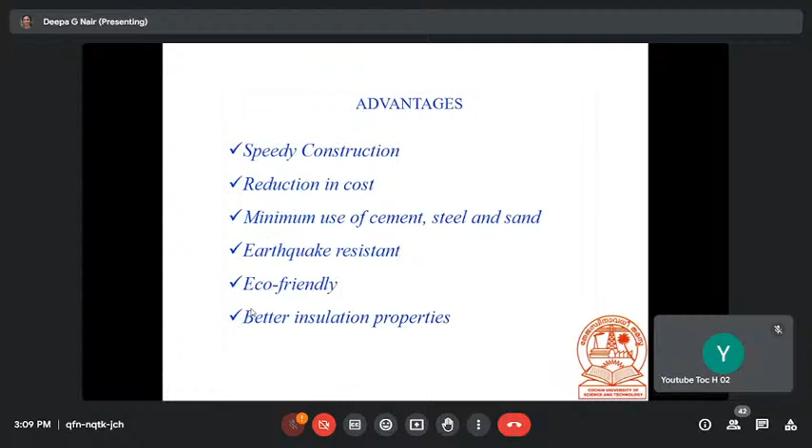We will be able to call it sustainable, we can call it a green building - it's an example of green technology. If you think about the construction of a small residential building with 6 panels of required size, four for the walls and two pieces for the slope roof, a small house can be built through self-help within a few days. For mass housing, we can think about this technology to reduce the cost of construction.

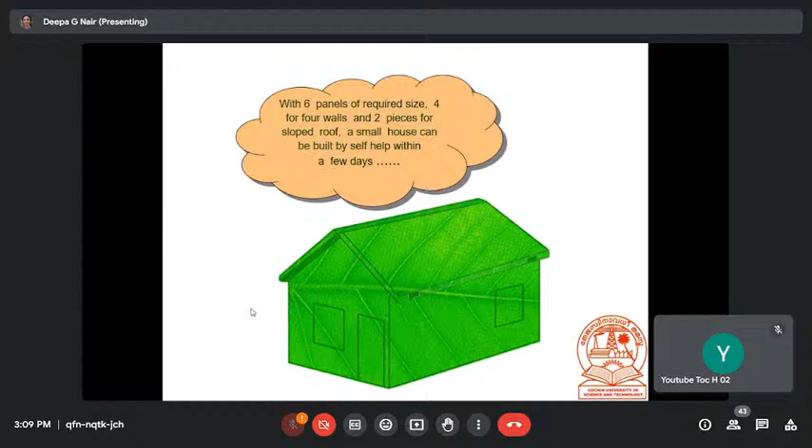But how far it is sustainable, we need to evaluate other aspects of sustainability also. So this is an example of green construction, I would say.

So we'll come to the conclusion. What we discussed so far - we started with the discussion of sustainable construction, conceptualizing it. So the conclusion is that 4 aspects are there of sustainability: people, planet, prosperity, and project. Sustainability of innovative construction practices can only be ensured by meeting the objectives of all these 4 aspects. We won't be able to leave any of these aspects - we have to ensure all of them.

Significance of each of the objectives can be decided based on the demand of situations, without overlooking the other objectives of sustainable construction.

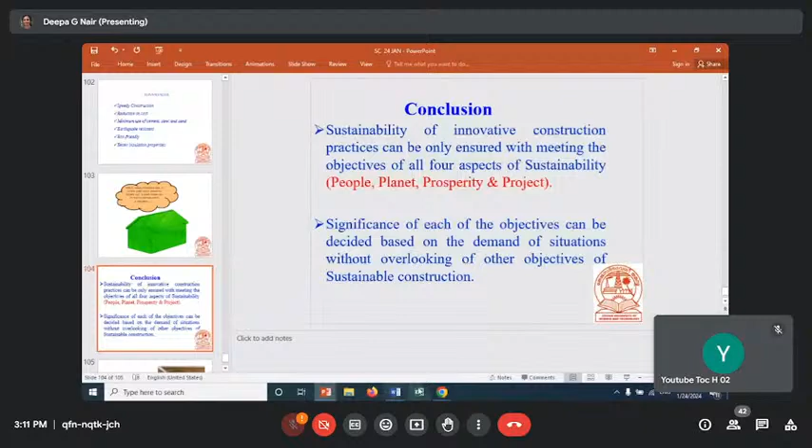Yes, thank you. Any questions? Any clarifications? Yes. Can Madam, you? Yeah. Yes.

Clear. Madam, is there any step that has been taken up to include these things in the codes that we follow for our construction works now? Means the sustainability aspects? Sustainability aspects with respect to performance level only have been included in the codes. It's not - so, no, not yet included.

What could be the step forward for this, like in any of the forums? That's what we were also thinking about. Now, if we think about green building rating systems, we have many rating systems like GRIHA, IGBC, and all those things - but it's for the building. The same way, the next stage of this work is to address sustainability more broadly.

We are working under that. We have to develop it as a rating system so that we can directly give it to construction and real estate developers. They can directly get some rating, and that would be helpful.